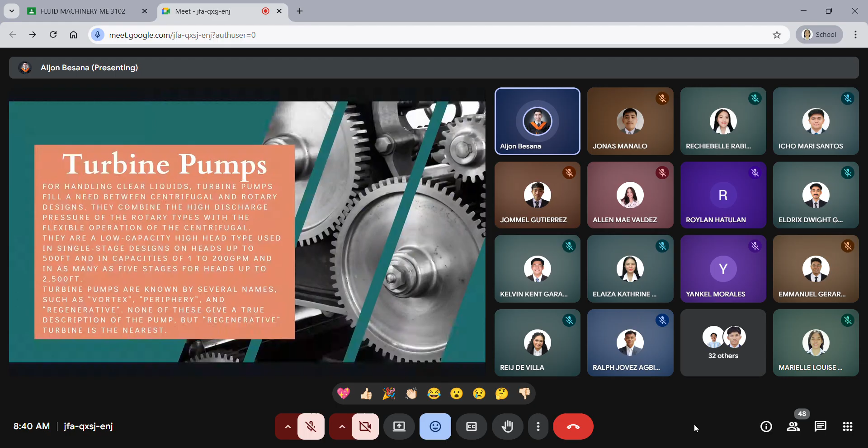Alright. So here, meron ulit video si sir for this type of pump. So let's have this po.

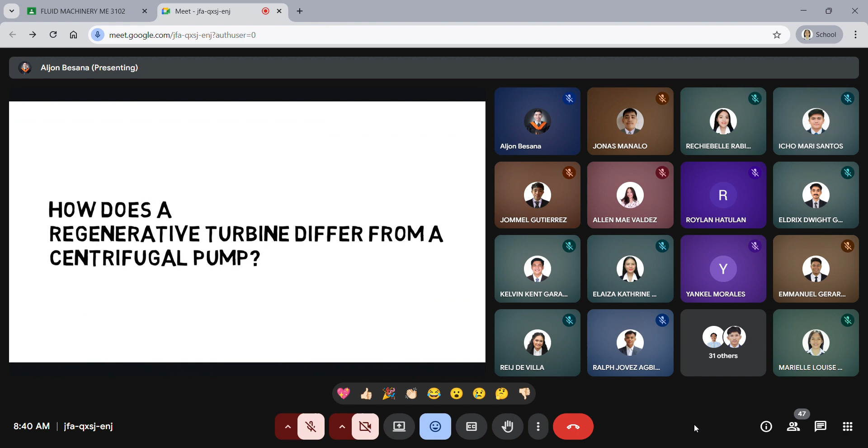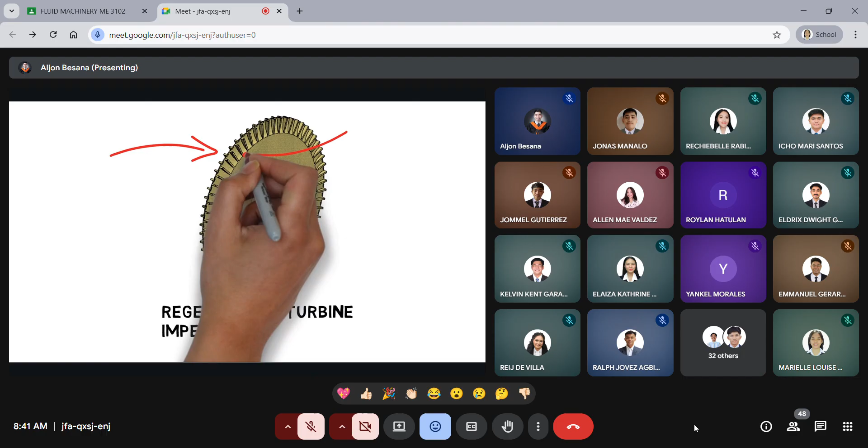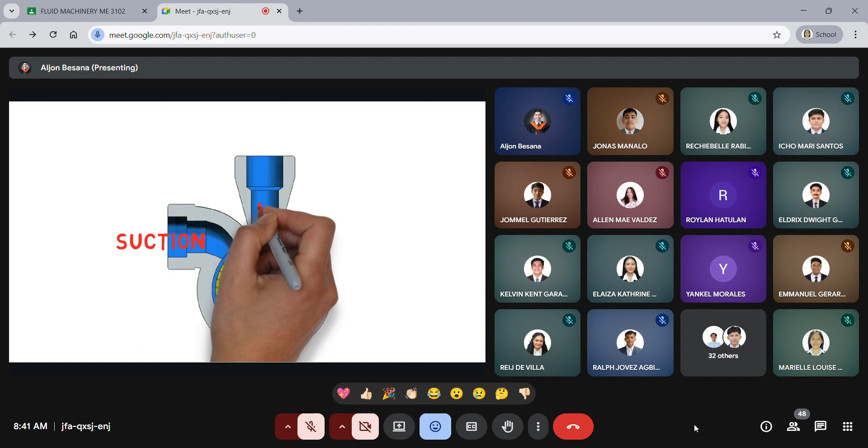The main difference between a regenerative turbine pump and a centrifugal pump is in the impeller. A standard centrifugal impeller has curved vanes that extend from the center to the edge of the impeller. The regenerative turbine impeller has rows of vanes on each side of the impeller's rim. On the suction side, liquid is gathered by the impeller's vanes. After making only one revolution in the annular channel, the fluid has a high velocity that sends the liquid out the discharge. Liquid entering a centrifugal pump's impeller can pass between the vanes only once. Energy is added to the liquid as it travels from the center of the impeller to the rim.

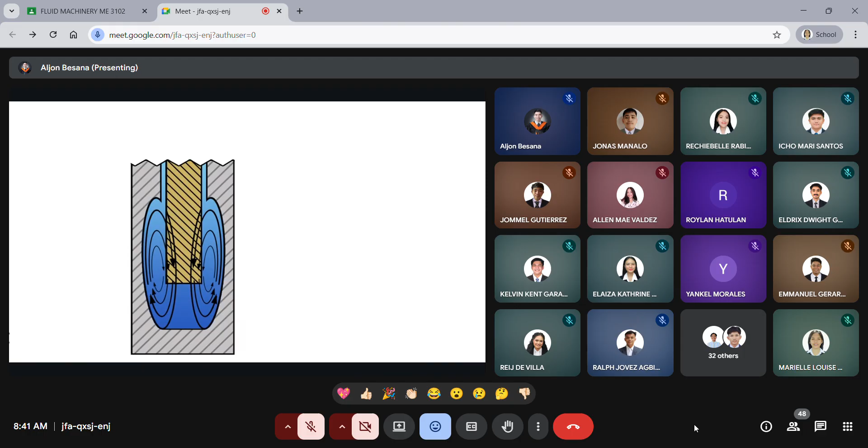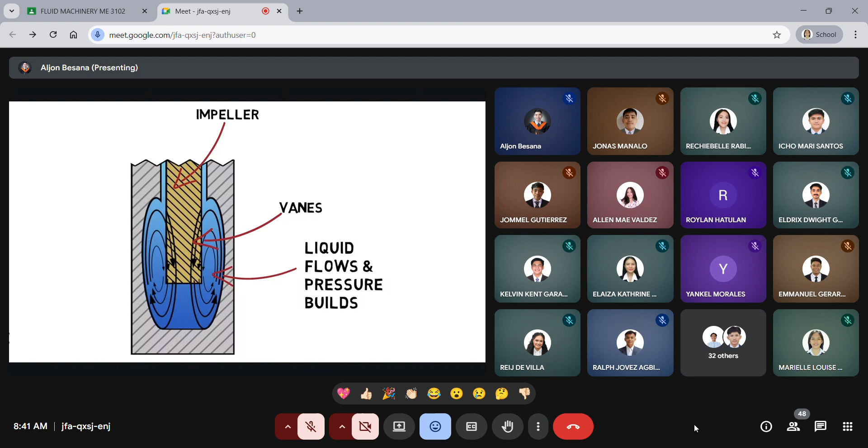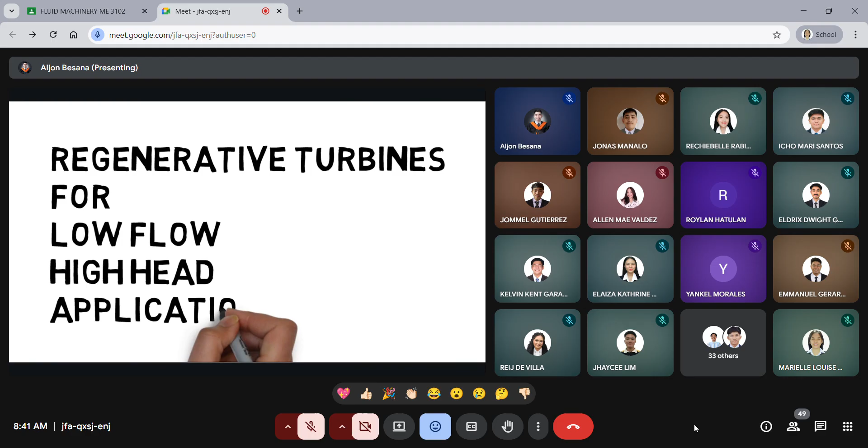In a regenerative turbine pump, liquid recirculates between the impeller's vanes. This helical action carries the liquid forward. Energy is added to the liquid in a number of impulses by the impeller's vanes as it travels from suction to discharge as the liquid builds pressure. For low-flow, high-head applications, regenerative turbine pumps offer better efficiency than centrifugal pumps and can develop several times the discharge pressure of a centrifugal pump having an equally sized impeller.

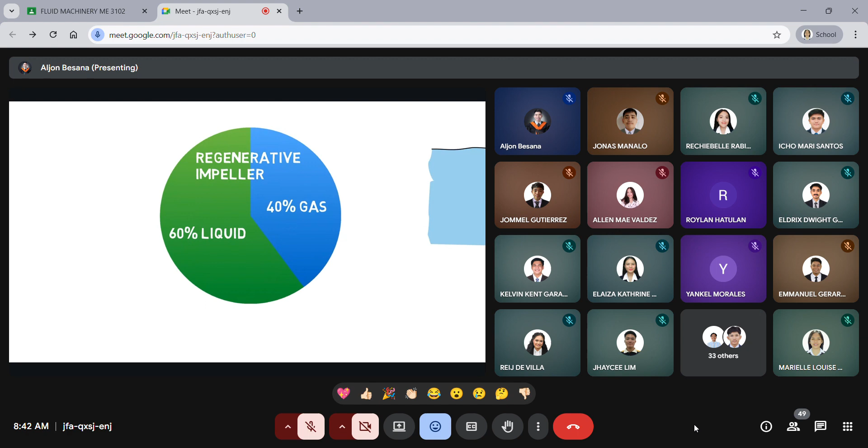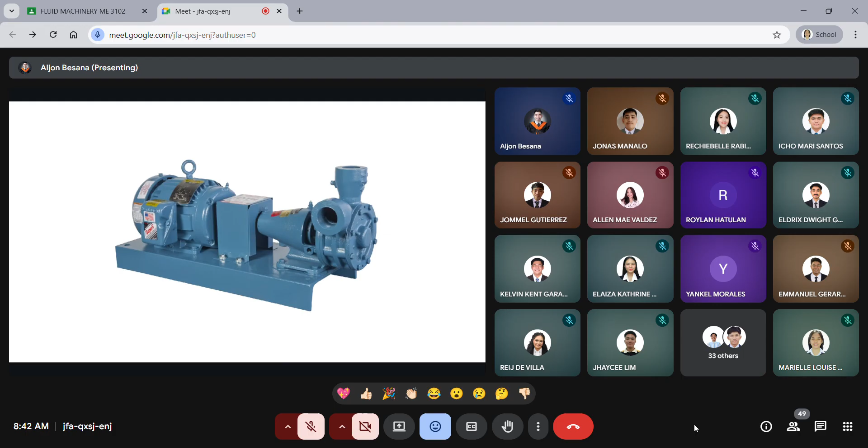The regenerative turbine impeller can pump fluid with up to 40% entrained gases without damage from cavitation or any performance loss. Centrifugal pumps are not designed to handle gas in a liquid. Gas in a centrifugal pump can create a significant loss in performance, causing fluctuating flow, discharge pressure, and unnecessary wear and vibration of the centrifugal pump's internal components. This makes a regenerative turbine pump a great solution where cavitation is a concern. To learn more about regenerative turbine pumps, visit rothpump.com.

Alright, so that is for our turbine pump, also known as our regenerative pump po.

Alright, so we also have the applications po ng ating turbine pump. Ginagamit po siya sa boiler feed service. Disregard nyo na sa ilalim. Pag sinabi nating boiler feed service, ito po yung sa boiler, yung nagdadala ng gases at saka nung mismong air po natin, from our source papunta doon sa mismo nating turbine, yung tinatawag na boiler feed service po.

Then also, it is used for our condensate returns. Pag sinabing condensate returns, once yung ating condensate ay na-turn into liquid na, then we are going to use this type of pump to repeat the cycle, para magamit ulit yung ating fluid. So turbine pumps are also used on condensate return units where steam heating boilers operate at 15 to 150 psi.

Also, on this job, makeup water can be put directly into the boiler or into the receiver tank. Since the receiver tank handles only condensate, the tank need be only about half the size used for comparable boiler service. When returns accumulate in the receiver, a float switch starts the pump to empty the tank until it's stopped by a low water level.

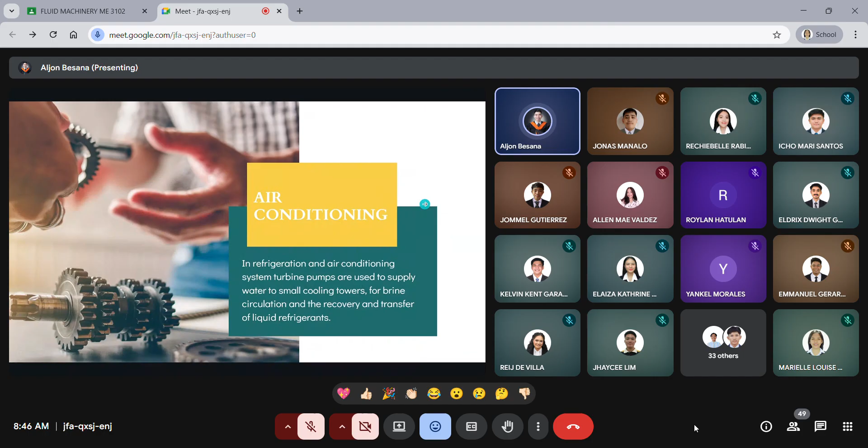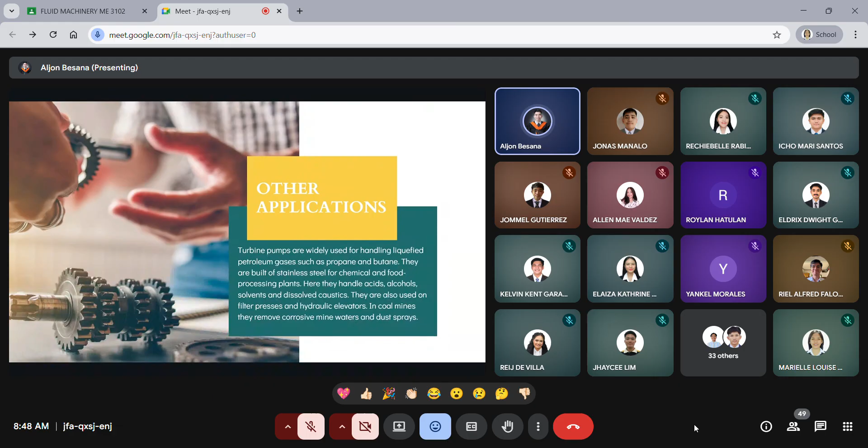In coal mines, they remove corrosive mine water, and also for dust spray, we use our turbine or regenerative pump. Okay? So let's now proceed with our propeller pump.

So pag sinabi nating propeller pump, on the same axis. Propeller pump is also known as our axial pump. So axial pumps or propeller pumps are for heads under 40 feet and capacities above 300 gallons per minute, as found in drainage, sewage systems, and storm water disposal.

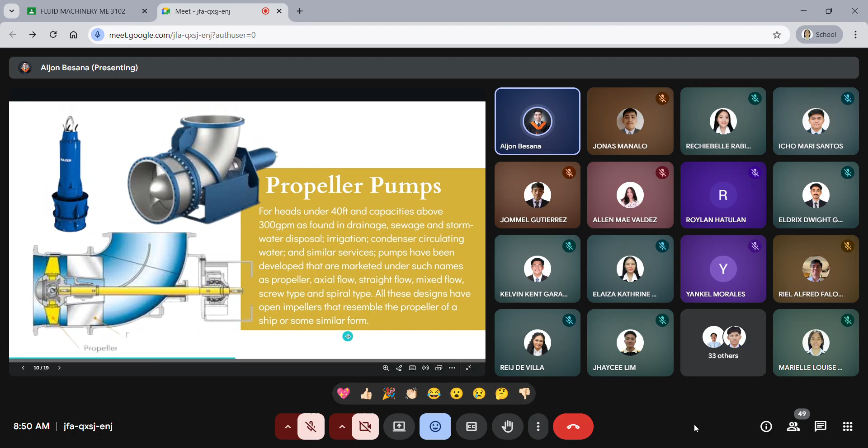Okay, so let's have a video for this axial flow pump, or what we call our propeller pump. Again, axial flow is the same as our propeller pump; same type, different names lang po.

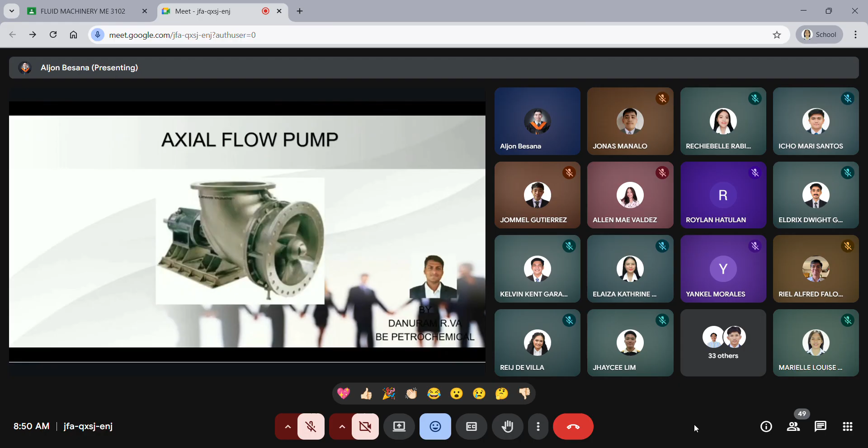Welcome back to my YouTube channel. In this video, we are going to see about axial flow pump. What's meant by an axial flow pump? An axial flow pump is a type of dynamic pump which is designed to move a fluid parallel to the pump shaft rather than radially outward from the impeller. So basically, it has an extended shaft which connects an impeller. It is also known as a propeller pump because the impeller in an axial flow pump resembles a boat propeller.

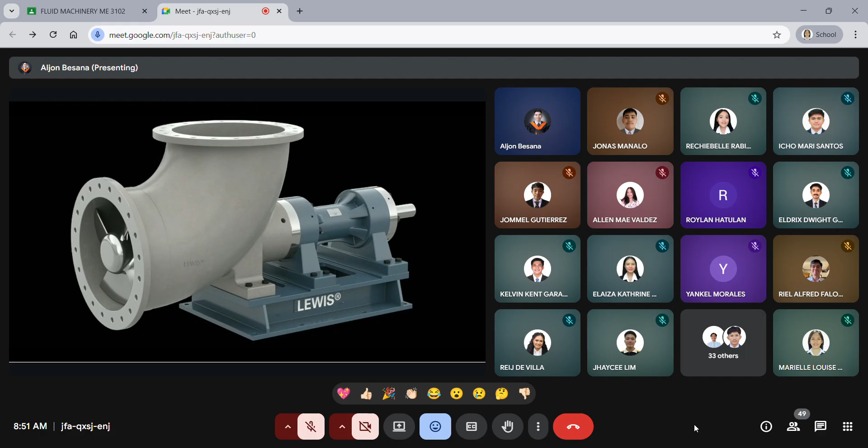Basically, this pump is located at the elbow joint of a piping system, which helps the fluid flow parallel in the piping system. Here are a few key components in the axial flow pump. First, the impeller, the rotating component with the axial blade that generates the fluid flow. Next, casing. The casing directs the fluid flow and helps in optimizing the efficiency. And the final one, suction and discharge port, the point where a fluid enters and exits the pump.

So let us see the working of axial flow pump. First, we have an impeller design. Basically, the impeller of an axial flow pump has blades that resemble a propeller. So as the impeller rotates, it imparts kinetic energy and momentum to the fluid.

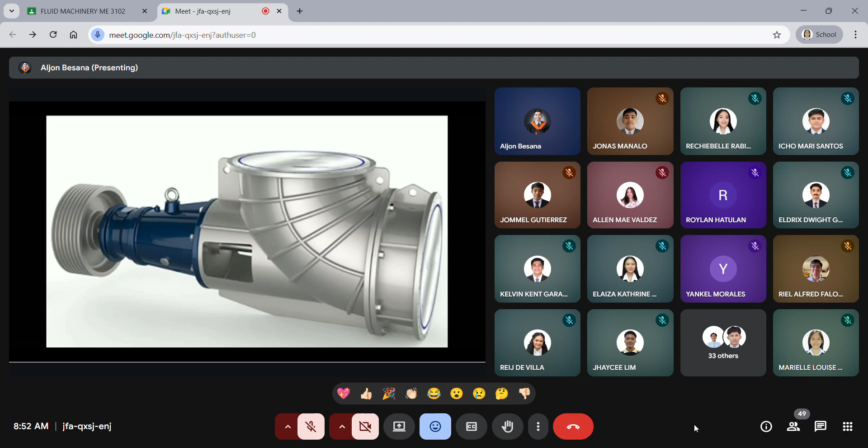So kinetic energy means the energy of an object depending on the mass and the velocity. So it imparts the kinetic energy to the fluid. So it flows in a casing. A casing is the outer part of an axial flow pump. So it moves along with the shaft. As I said before, it has an extended shaft that connects the impeller. So by this way, it goes to the suction and the discharge.

Let us look at the application of an axial flow pump. It is used for pumping water in a larger scale irrigation system. So basically, it is used in agricultural irrigation systems. It is effective in flood water by moving a large volume of water. So basically, it is used in flood control. It is applied in power plants and industrial facilities for cooling water circulation. So it is used in a cooling system.

It is used in a wastewater treatment plant for fluid transfer. It is suitable for providing aeration and water circulation in fish farms. So basically, it is used for a larger aquarium. It's found in ship propulsion systems as well as bilge pumping.

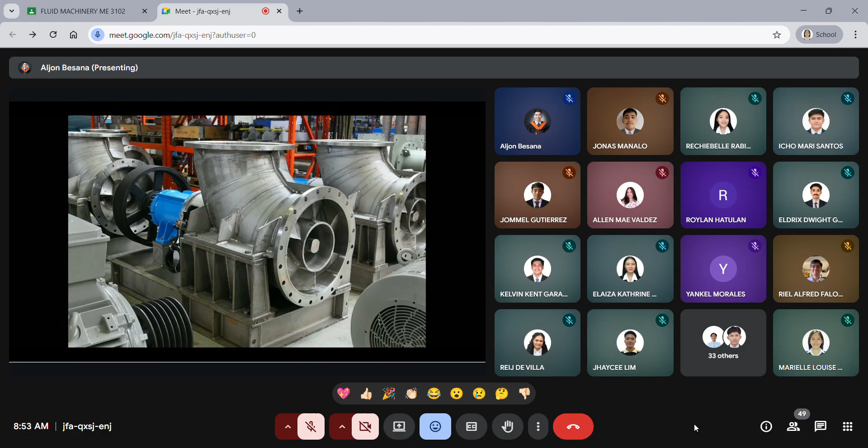Let us see the advantages of an axial flow pump. It has a high flow rate; axial pumps are capable of handling very high flow rates, which are used for flood control, by moving a large volume of water. It is well suited for applications with low head requirements. It's generally more compact compared to a centrifugal pump.

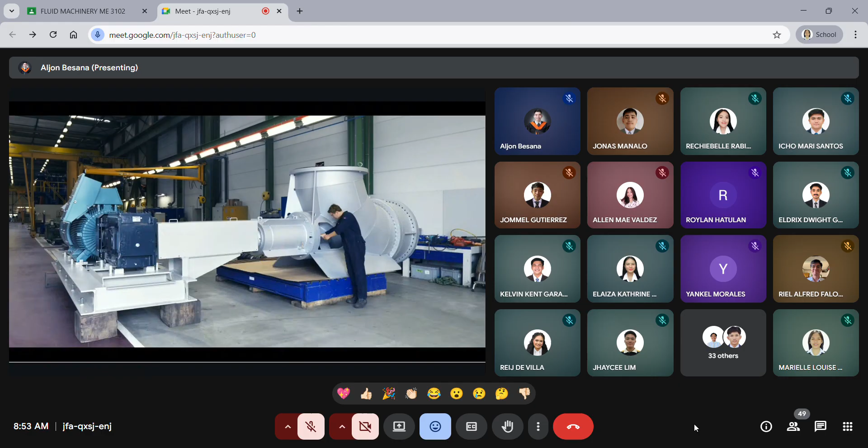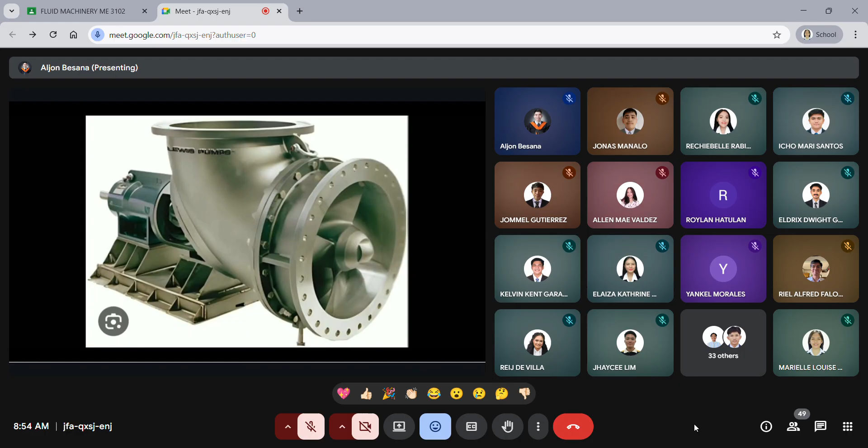Let us look at the disadvantages of an axial flow pump. It is not suitable for applications requiring high pressure generation. Performance can be affected by changes in the system conditions. And it has a specific application, best suited for applications with a high flow and a low head requirement, like high flow rate and low pressure.

And in summary, axial flow pumps are specialized centrifugal pumps designed for applications where moving a large volume of fluid at a low pressure is critical. Their efficiency in this specific scenario makes them valuable in various industries, particularly in situations with the need for high flow rates. So basically it works with a large volume of fluid in low pressure conditions. In a situation where an industry or process requires a high flow rate, it's a well suited pump. And that's all about the axial flow pump.

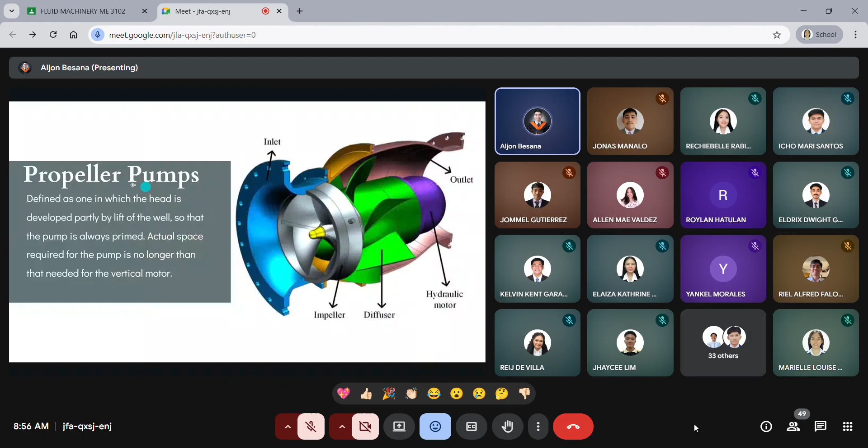So this is the propeller pump, or the mixed flow, what we already discussed. One in which head is developed partly by lift so that the pump is always primed, and the space required for the pump is no longer than that needed for the vertical motor. So, mixed flow pump.

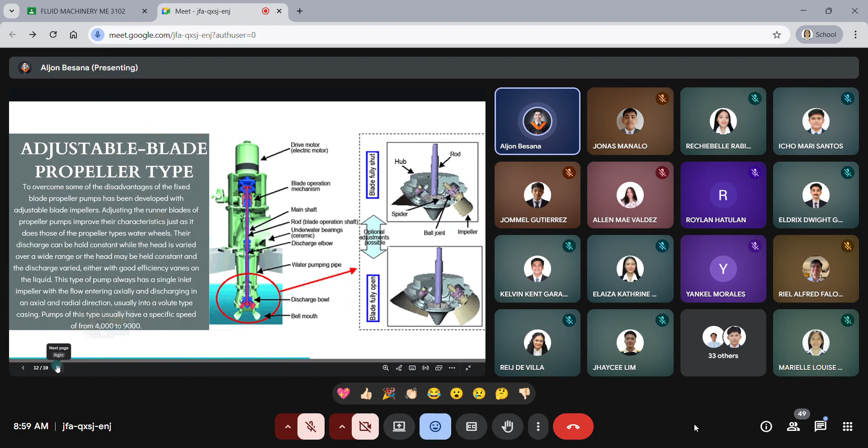Okay, let's now have the next one. We have the axial flow pump, or simply, this is already our propeller pump. So sa axial flow pump, ang pinakaiba lang niya doon sa susunod na vertical pump, yung orientation ng ating axial flow pump ay nakahiga or in horizontal form. Kaya siya sinabi natin axial flow or in the x-axis.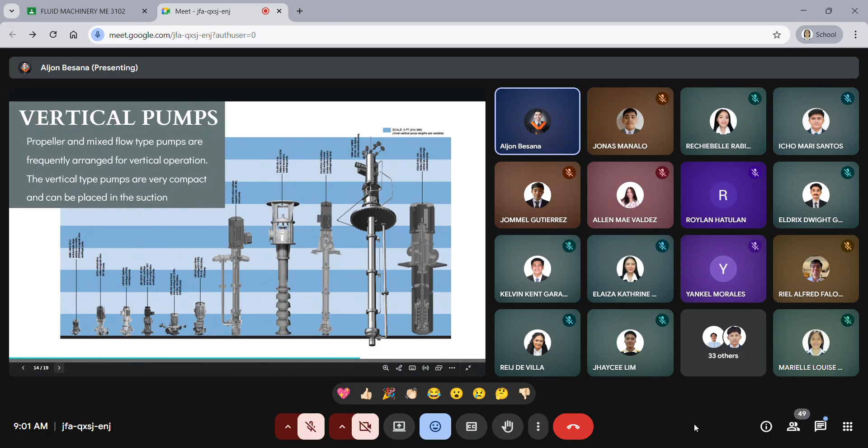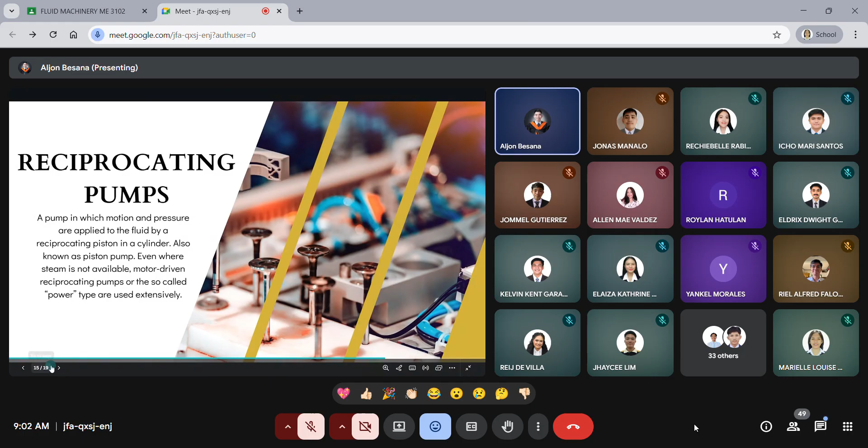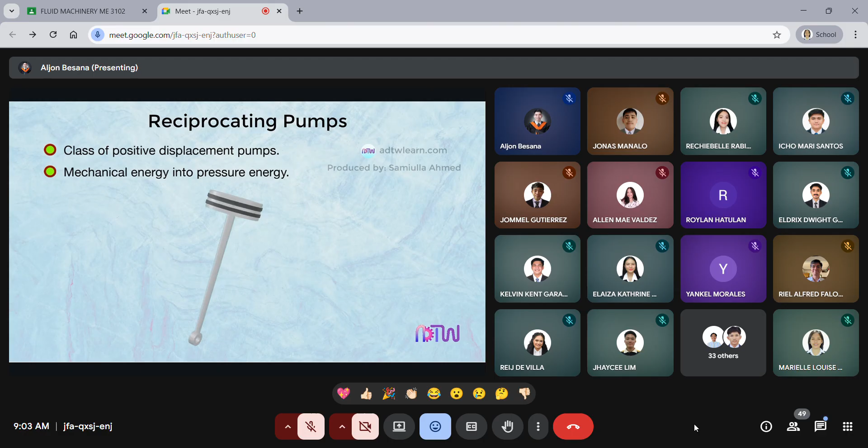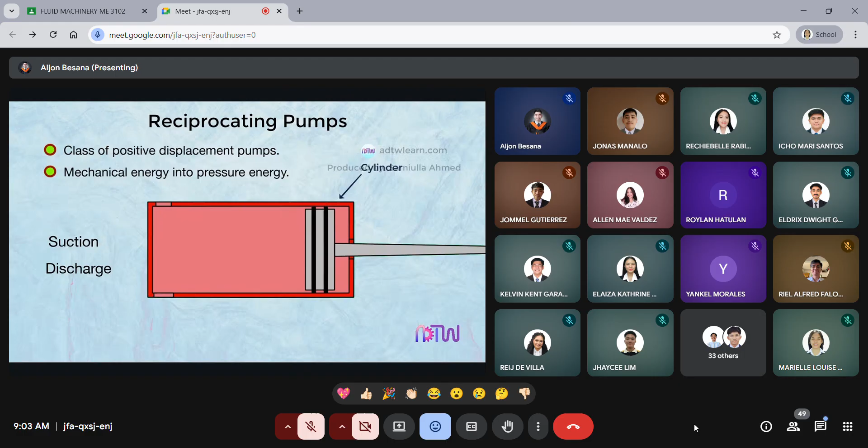Reciprocating pumps. Reciprocating pumps are the class of positive displacement pumps. They change mechanical energy into pressure energy. They use a piston or plunger for pumping the liquid from one location to another location. The piston or plunger reciprocates inside the cylinder, and this motion accomplishes the suction and discharge of liquid. The reciprocating pump works on the principle of positive displacement.

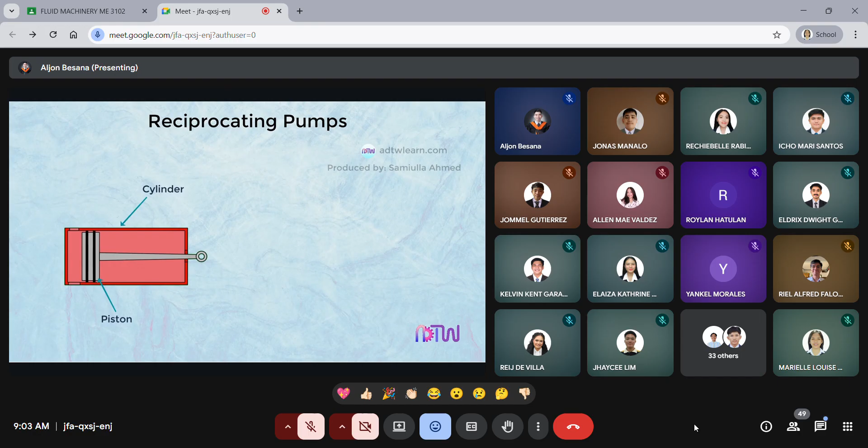It consists of a piston that moves back and forth inside the cylinder. The piston is connected to a crankshaft with the help of a connecting rod. When the motor rotates, the crankshaft converts the rotary motion into reciprocating motion, and this reciprocating motion is transferred to the piston using the connecting rod. Therefore, the piston starts reciprocating. During this motion, when the piston moves back in the cylinder, it creates a low pressure inside the cylinder. Due to this low pressure, the water from the tank is sucked into the cylinder.

These are non-return valves. This valve is a suction valve, and this is a delivery valve. These valves play an important role during the working of this pump. At the time of suction, the suction valve allows water to flow inside the cylinder, while the delivery valve remains closed.

As the piston starts moving towards the left, the suction valve closes and the delivery valve opens. Due to the pushing action of the piston, the water goes out from the discharge valve to the delivery side. This is how the single-acting reciprocating pump works.

But with this type of pump, there is a drawback: single-acting pumps discharge on either the forward or return stroke of the piston or plunger. Every cycle of the pump displaces only one volume of liquid. As you can see during the suction process, there is no delivery of liquid at the discharge side.

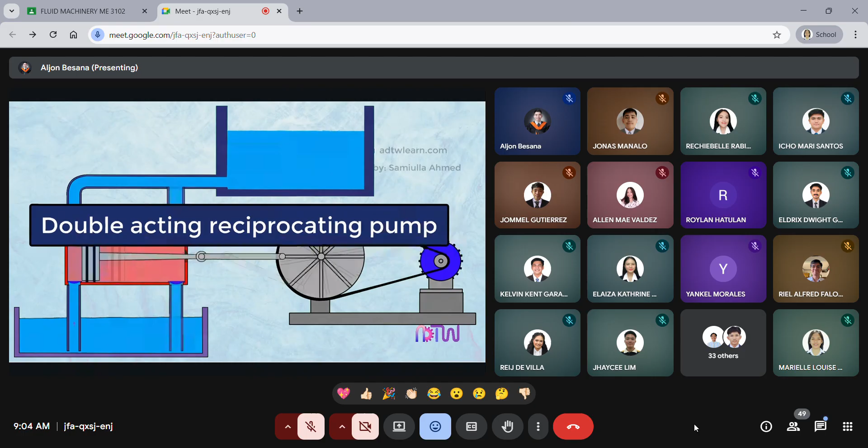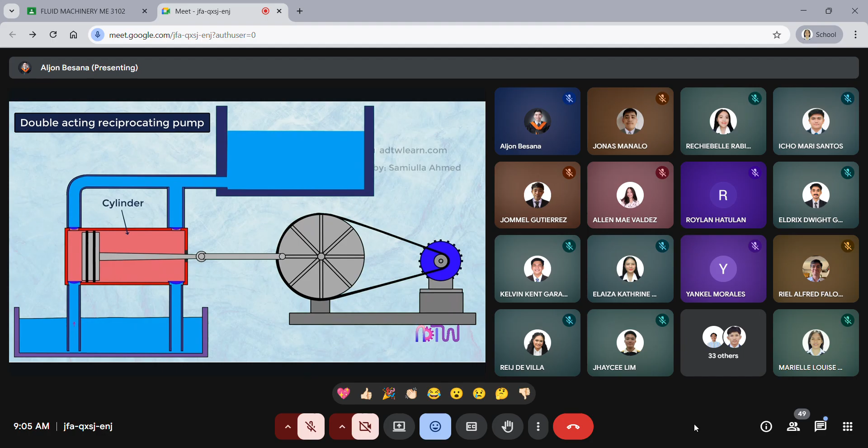To get discharge during both strokes, we use a double-acting reciprocating pump. This is the design of a double-acting reciprocating pump. The driving mechanism of this pump is the same as a single-acting pump; the only difference is in the design of the cylinder. In this pump, the cylinder is divided into two chambers, and the piston moves back and forth inside this cylinder.

As the piston moves forward, the discharge valve opens and the liquid is discharged from the forward chamber into the discharge line. But during this same stroke, the chamber behind the piston is being filled through the inlet valve present in it. And when the piston moves backward, the discharge valve present in this chamber opens and the liquid is discharged from the behind chamber into the discharge line.

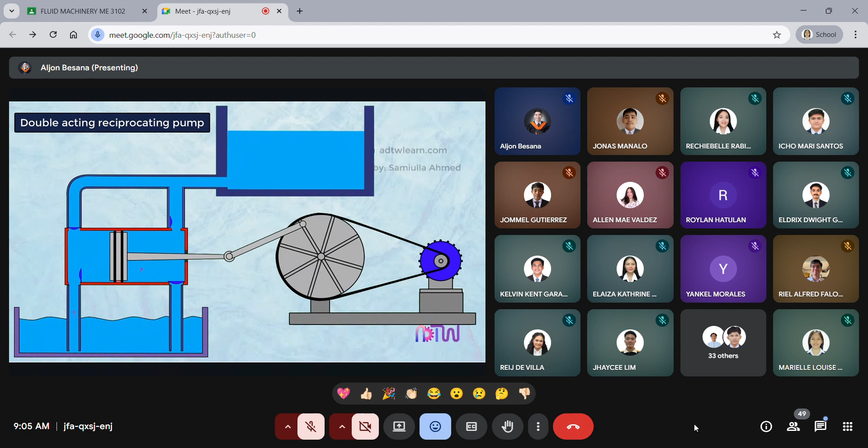But during this same stroke, the inlet valve present in the left chamber opens, and the liquid gets filled in the left chamber. This is how a double-acting reciprocating pump gives discharge during both strokes. This is how the single and the double-acting reciprocating pump works.

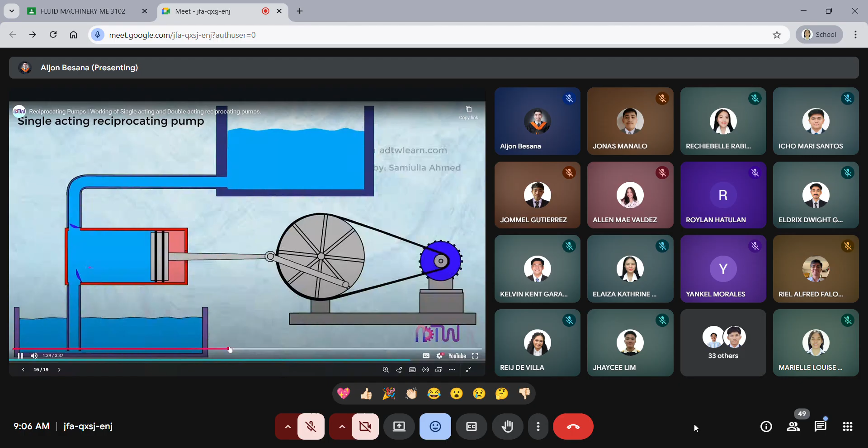I hope you have understood how a single-acting and a double-acting reciprocating pump works. If you want to learn more, this is how the single-acting reciprocating pump works.

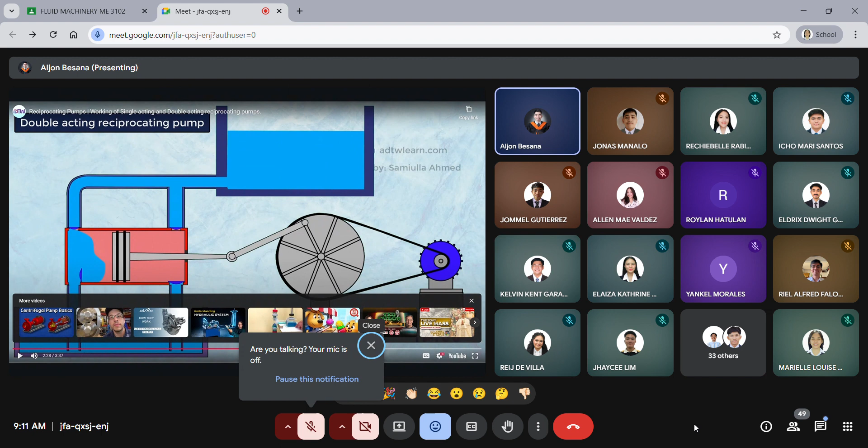When the piston reaches the end of the stroke, expansion of this air tends to keep the water in motion until the reverse stroke begins. Frequently, means are provided to recharge the air chamber, which may be done by providing valves for draining water from the space above the discharge valves and replacing it.

This is in terms of the pumping action. Comparison of power-driven and direct-acting pumps: power-driven pumps use an electric motor, while direct-acting pumps are those we use, for example, in the Pozo Negro. Other types of reciprocating pumps include stoneware pumps made of clay material, hard rubber pumps, porcelain plungers, sludge pumps, diaphragm pumps, combination of diaphragm and piston, and pumps without suction valves.

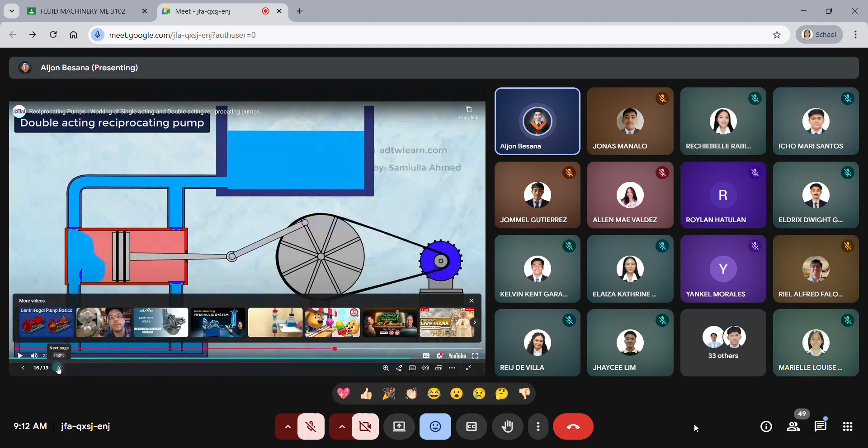These are also steam jacketed as well. So these are just types of reciprocating pumps based on the construction or material used in the creation of that type of pump.

Let's now proceed with our rotary pump. When we say rotary pump, for many industrial plants and power stations, oil, water, chemical, and other liquids must be handled under operating conditions for which reciprocating and centrifugal pumps are not suited.

Akin na lang, why not? Ayaw niyo naman? Or ayaw niyo? Thank you, ma'am, ang sweet talaga ng ating ma'am. Ma'am, thank you po, ay salamat ma'am. Sweet naman, binigyan ng coffee si sir. Uy, anong coffee to? City Cafe. Pero at least may nagbigay.

Alright, rotary pumps have construction features that make them adaptable to many applications. In spite of their external resemblance to centrifugal pumps, rotary pumps are more like reciprocating pumps because both are positive displacement types. The rotary type combines the constant discharge characteristic of the centrifugal type with the positive discharge features of the reciprocating type.

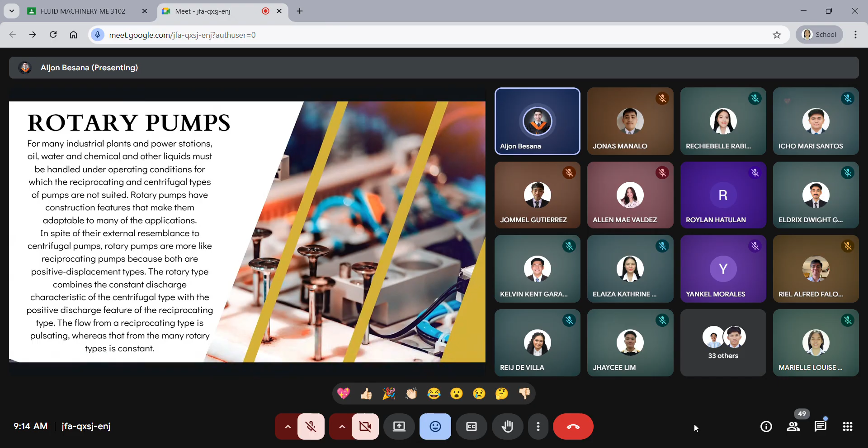So with this, let's watch this video.

Hey guys, welcome back to the channel. In our previous videos, we talked about how various types of pumps work, including centrifugal pumps and reciprocating pumps. But it's not over yet. Pumps are such a wide and evolving topic that a person can keep on talking and never stop. So in today's video, we'll be talking about another type of pump called the rotary pump.

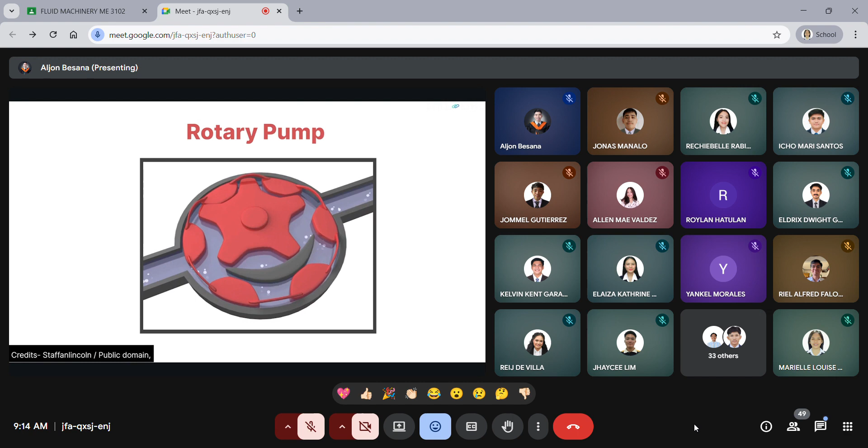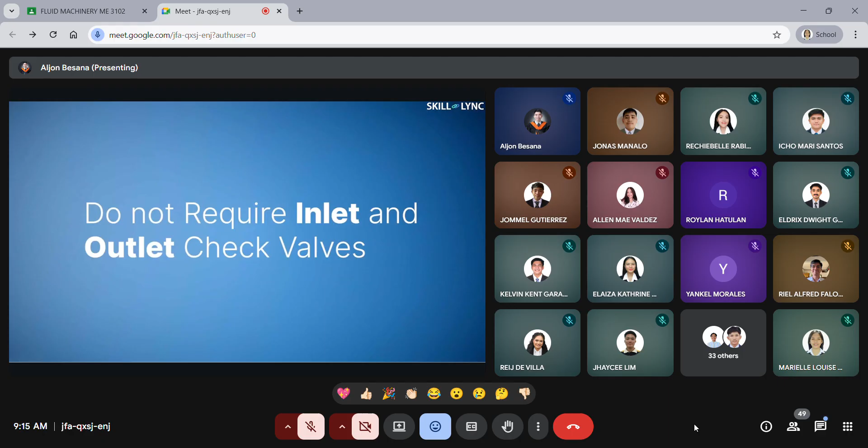Rotary pumps are positive displacement pumps that use rotary motion instead of reciprocating motion in their pumping action. Rotary pumps can be designed to pump liquids, gases, and even mixtures of the two. Unlike reciprocating pumps, rotary pumps do not require an inlet or outlet check valve since the fluid flow is continuous, and they develop a dynamic seal. All rotary pumps have three major operations, unlike the two of reciprocating pumps. The first is the suction operation, where fluid is sucked into the pump from the pipe or reservoir.

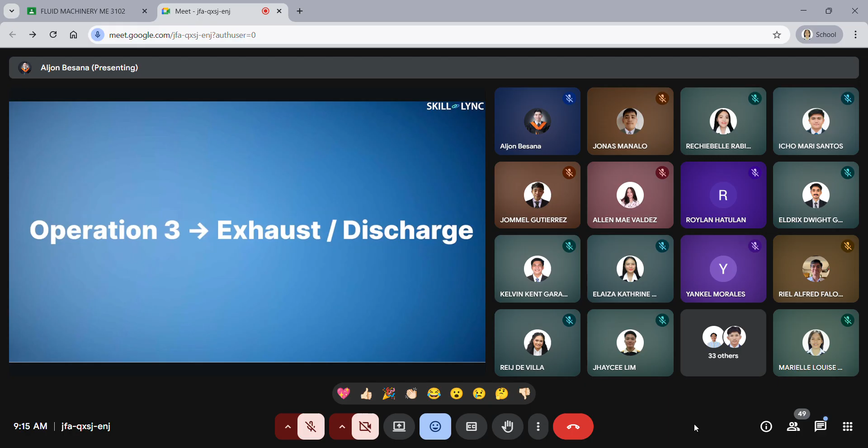The next operation is the travel operation, where fluid moves from the suction side of the pump to the exit side. The third operation is the exhaust operation, where fluid exits the pump and flows into the exit pipe. If you feel all this a bit confusing, don't worry. As we progress in the video, you'll be able to get a better understanding.

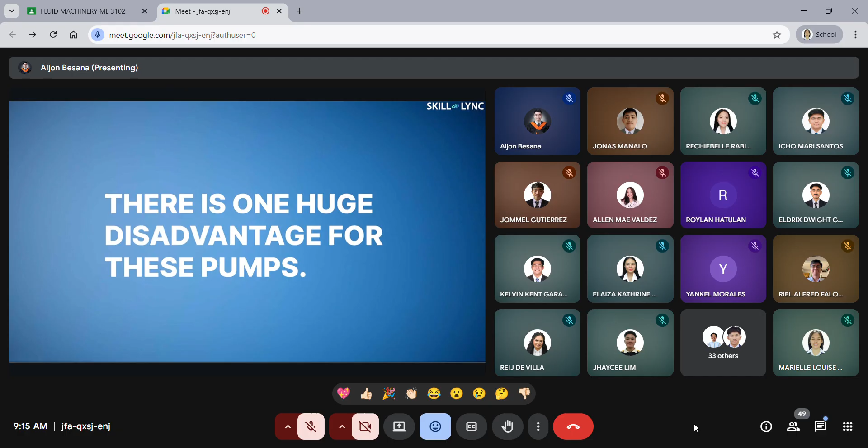Ever since the development of better drivers for centrifugal pumps, they have been continuously replacing all types of pumps. But there is one huge disadvantage for these pumps: similar to how kryptonite is dangerous for Superman, so is high viscosity fluid for centrifugal pumps.

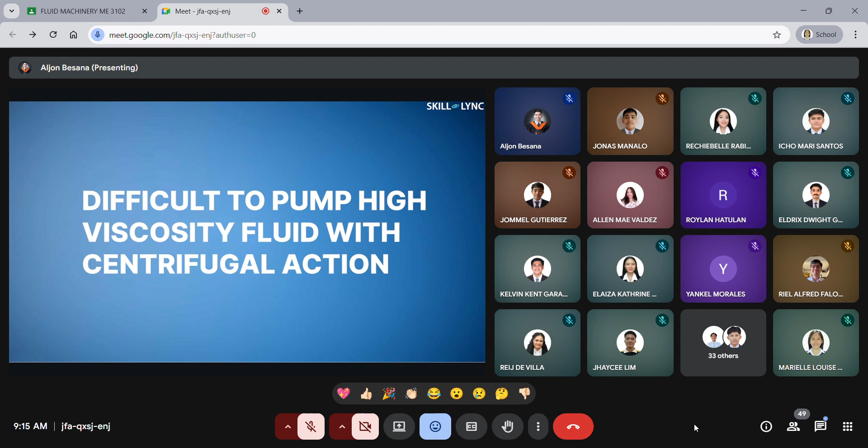This is because it is very difficult to pump these fluids with just the centrifugal action. Due to this, a different type of pump called gear pumps are used. High viscosity fluids are the bread and butter of gear pumps.

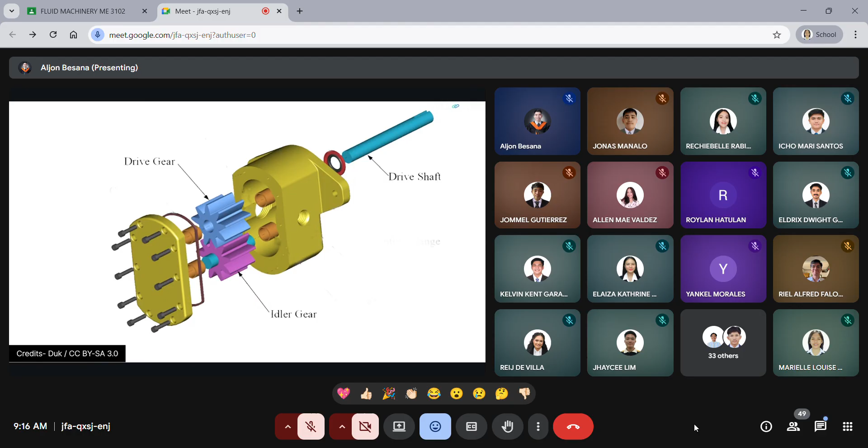Gear pumps consist of two gears meshing each other. One gear is driven by an external shaft, called the drive gear. The other gear acts as an idler gear and rotates with the help of the meshing action from the driver gear. Gear pumps normally have extremely close tolerance between the gear teeth and the wall of the pump case. This close tolerance is the main reason behind the pumping action.

As the gears of the pump rotate, they get separated at the suction side of the pump. This area is generally filled with fluid. Even if the suction area is not filled, the gear pumps are self-priming, meaning they are capable of generating sufficient suction pressure to pull the fluid towards the gears for pumping.

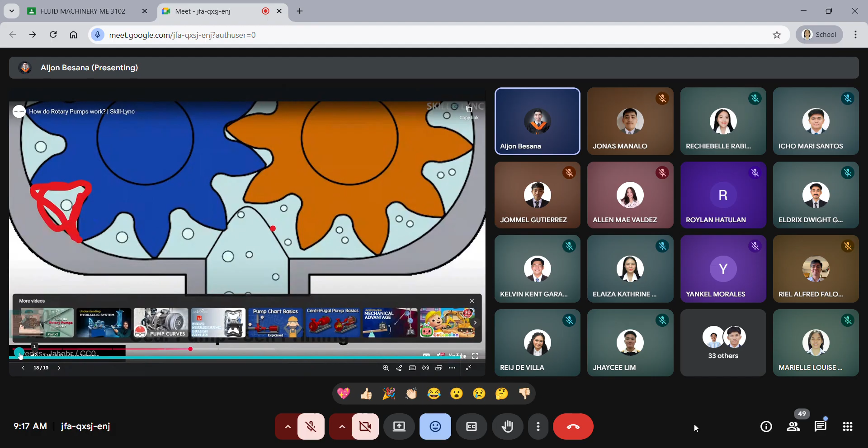This is the end of the suction operation. As the gears rotate, the fluid is carried by the gears towards the discharge side of the pump. The tight meshing and almost zero clearance ensures that the fluid doesn't leak. This concludes the travel operation.

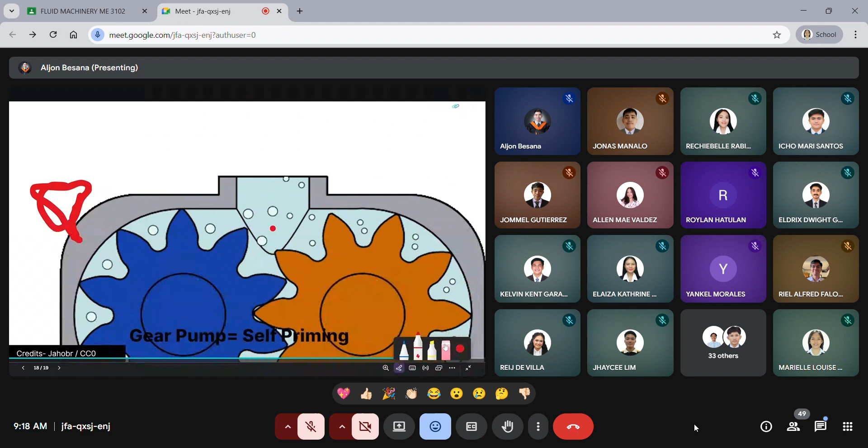As the gears now remesh together, the total volume will reduce. This forces the fluid out of the pump through the discharge pipe. This ends the discharge operation.

There are many variations and types of gear pumps. The variations are made to accommodate the different types of fluid that they will be used to pump. The first type is the external gear pump, which is the type we discussed until now.

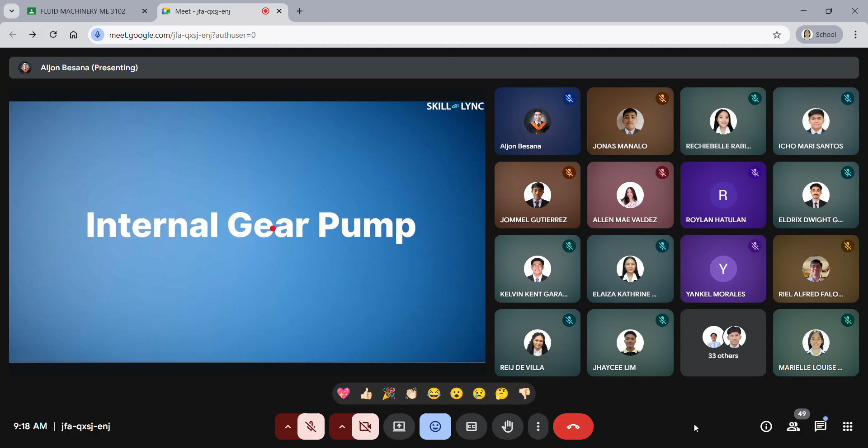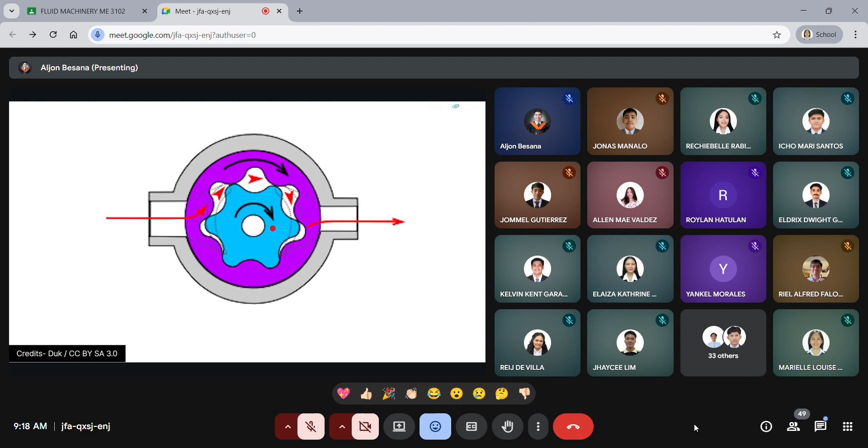The next type of gear pump is called the internal gear pump. There are two different variants: one is the gerotor and the other is the crescent gear pump. The gerotor is a type of gear pump which has two gears arranged one within another. Its working is similar to the external gear pumps.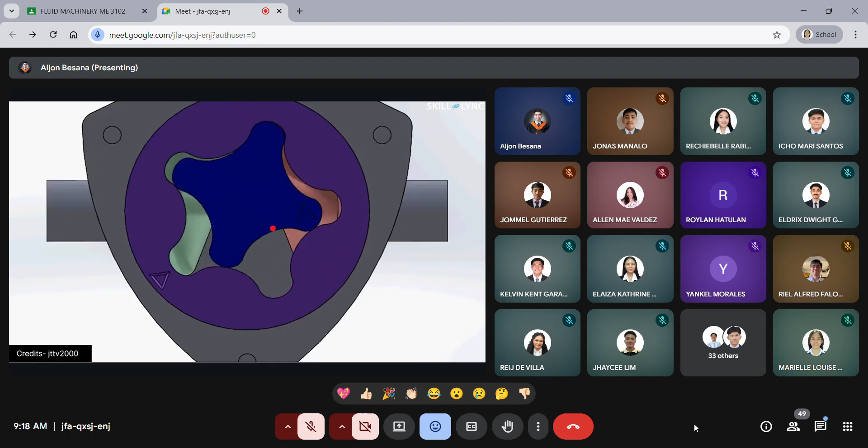The fluid enters the gerotor through an inlet port and is transported to the discharge port by the internal gear. Once the fluid is at the discharge side, the area between the two rotors decreases due to its shape, forcing the liquid out through the discharge port. Gerotor pumps are most commonly used in automobiles to pump lubricant or oil, because they are smaller than external gear pumps and are also able to pump viscous fluids efficiently.

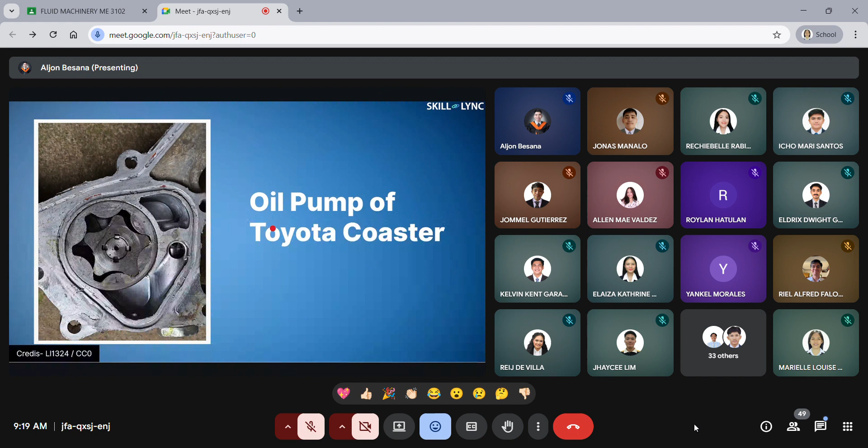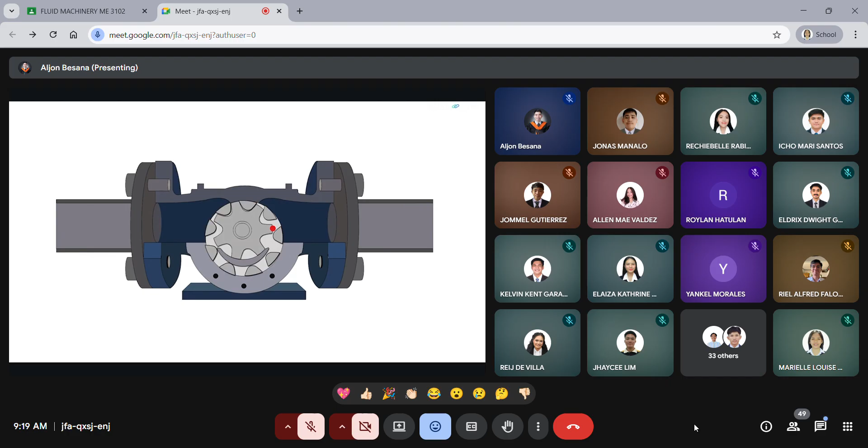The next type of internal gear pump is the crescent gear pump. Just like the previous two types, the crescent gear also has two gears which mesh together. The external gear is larger and has more teeth than the internal gear. However, it gets the name crescent due to the crescent or moon-shaped wall that is present inside the pump.

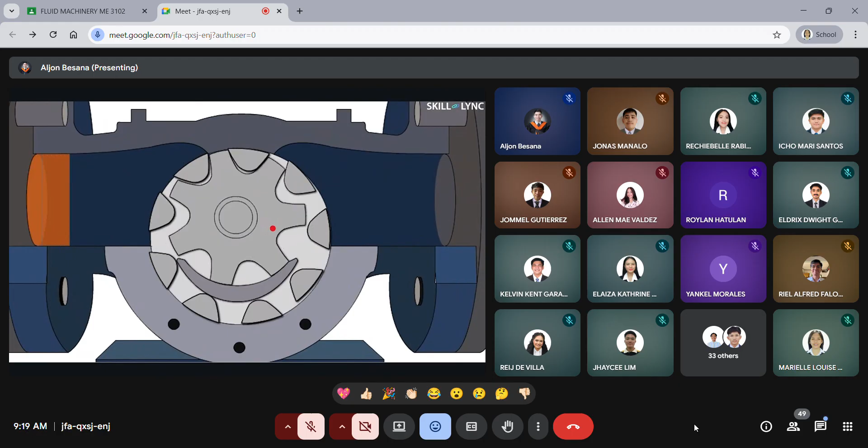When the teeth of the two gears come out of mesh, low-pressure zones are created at the gaps between the teeth. Fluid is trapped between the teeth of the gears and the walls of the pump. As the fluid travels with the gear, it reaches a point where the gear starts to mesh again, forcing the fluid out of the pump so it exits through the discharge pipe.

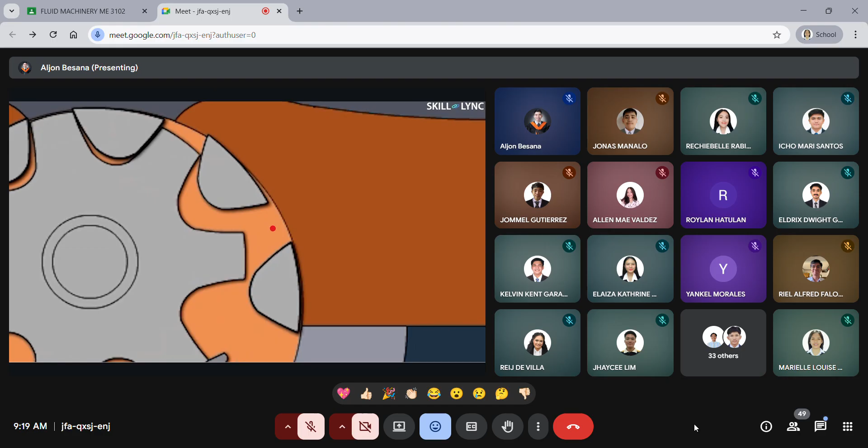Crescent pumps are able to pump fluids with much higher viscosity than gerotor pumps. These pumps are most commonly used in oil refineries to pump oil into holding tanks, and are also used in automatic transmission of cars to pump transmission fluid.

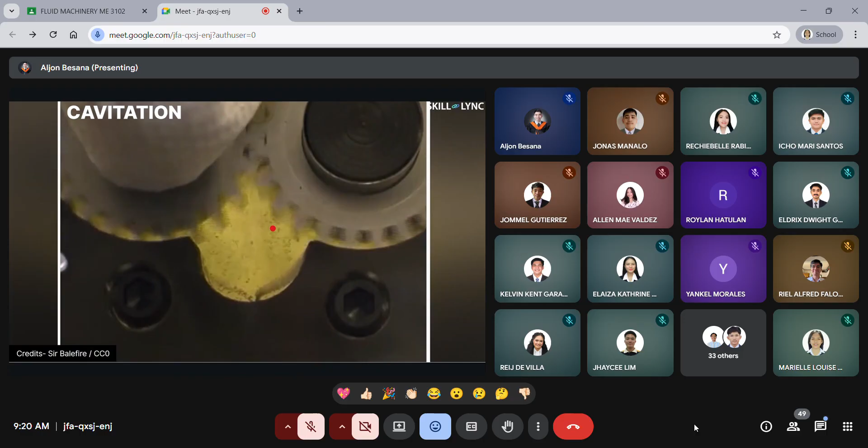Gear pumps are not without disadvantages. Increasing the RPM of the pumps higher than the prescribed value for a fluid can lead to cavitation. The pumps also have issues when pumping volatile liquids, because volatile liquids tend to vaporize locally as gear teeth spaces expand.

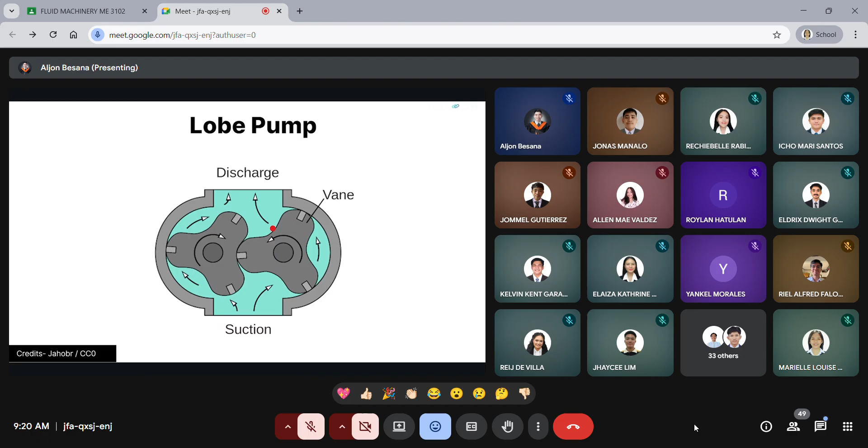To address this issue, a different kind of pump is used. Lobe pumps are similar to the external gear pumps in the way they work. Similar to how we have two gears which rotate and pump the fluid, lobe pumps have two lobes. The two lobes rotate in opposite directions to pump the fluid. When the two lobes of the pumps come out of the mesh, they increase the volume at the inlet side. This forces the fluid into the pump.

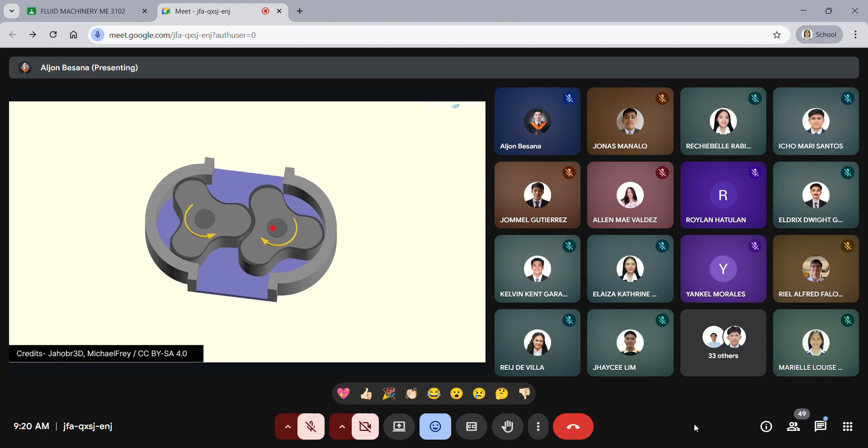As the lobes continue rotation, they carry the fluid towards the outlet side. Finally, when the lobes of the pump remesh again, the fluid is pumped into the exit port. Unlike the gear pumps, the lobes do not make contact with each other. Since there is no metal-to-metal contact, the abrasive wear is very less. This increases the life of the pumps.

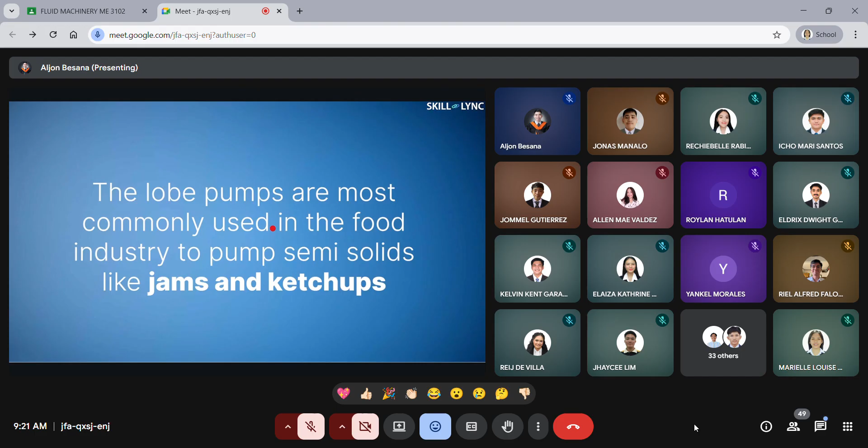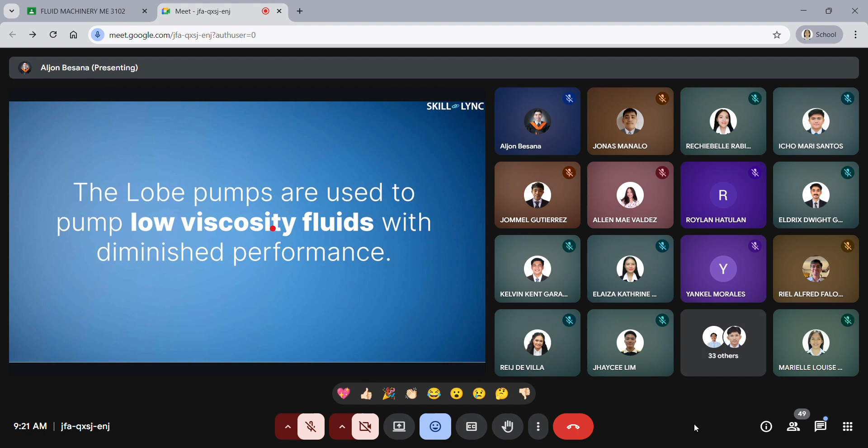The lobe pumps are most commonly used in the food industry to pump semi-solids like jams and ketchups. This is because they can handle semi-solids without degrading the product. The lobe pumps are used to pump low viscosity fluids with diminished performance. The loss in performance is mainly due to the fact that the lobes are not in contact with each other.